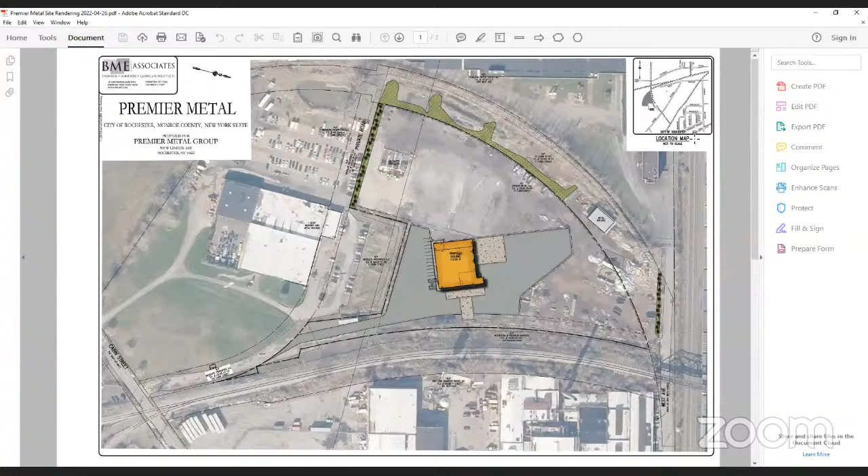All right, can you guys all see this okay? Yes, we can see the screen. Okay, perfect. Not a problem, just whoever the host is needs to enable the participant screen sharing. I'm getting like a weird looping going on with the audio. Mary, can you mute yourself, please? I think the feedback is from Mary live streaming. Oh okay, so yeah Mary, if you want to mute the YouTube live stream, that's why we're getting that weird echo. Anyway, okay perfect.

So thank you guys very much for having this special meeting. We're probably just a little sad not having a quorum again, but at least we get the other member here. We can give you guys an update and let you know what we're planning to do at this site.

So our project is located at 11 Cairn Street. It's over in kind of the western portion of the city. This graphic here is twisted, so north is actually toward the right of the screen. The site is located between Cairn Street and West Ave. Cairn Street is down here at the lower left portion of the site, or the screen. We have access to that site through the adjacent property. There are agreements in place, and we'll be doing some formalized easements to make sure that's documented in perpetuity. But again, we access off Cairn Street. We're about 600 feet into the site before you can see it, so there isn't a lot of visibility from that site.

The purpose of our application to the city was to develop a replacement building for a structure that was located there and burned down several years ago. The facility itself for the site does metal scrapping processing. So they effectively bring in materials from different businesses as well as a little bit of materials from private individuals looking to scrap the material, obviously for some money compensation. So basically, a client will come into the site and bring the materials in.

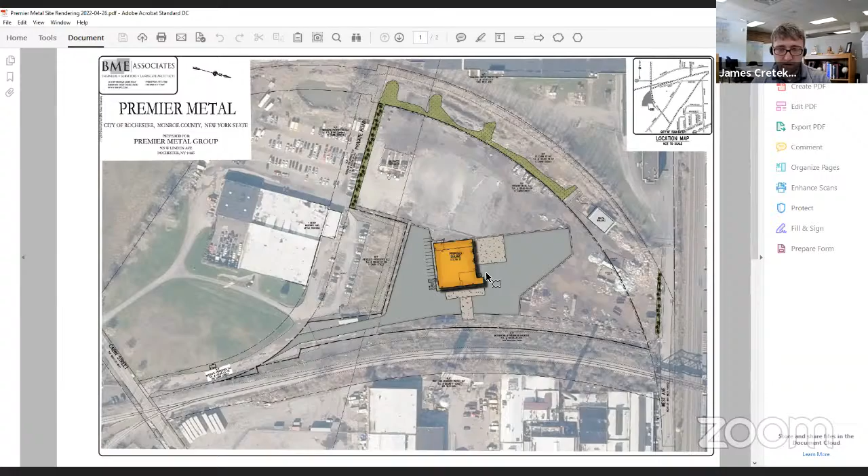The facility we're looking to build here is about 12,250 square feet. It does contain a small office area, so I'll zoom in here a little bit. The office area is going to be located in this portion of the building, with some meeting rooms, bathrooms, etc. The rest of the building is going to be basically a general storage area.

There will also be a couple at-grade loading dock areas here with some smaller scales for the smaller users and customers of the site, as well as a recessed loading dock for any larger tractor trailers that need to be loaded off. So this will be recessed, and then there'll be an at-grade loading dock where they can get the materials off at the finished floor elevation.

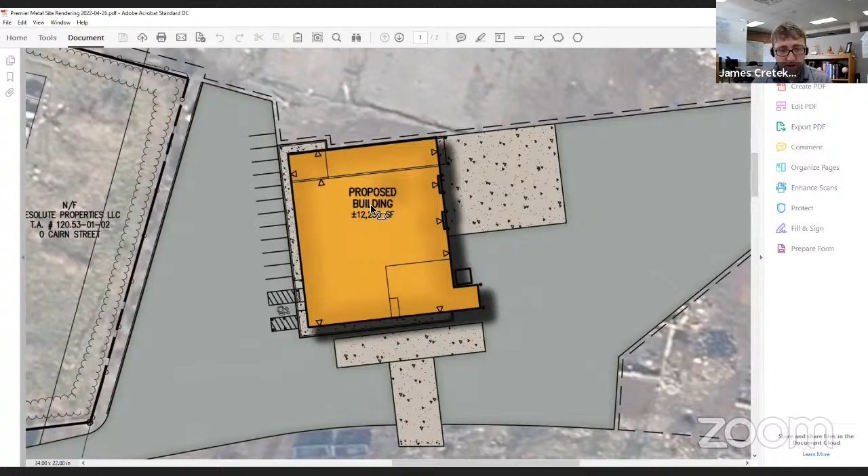The gray area you see shaded here is all going to be flexible pavement, so asphalt pavement, as well as some concrete pads at the loading dock areas. This area to the south, or lower portion of the building on the screen, is going to be for the vehicle scales. A vehicle will come in with all the materials, get weighed in here, move around to the back or wherever they're going to be unloading it, and then weigh out on their way out. The difference in the weight is how they calculate the funds that they will be compensated for.

Right now, the site is really just a heavily compacted gravel area. This is the site as it stands today. Again, you can see that it's pretty well utilized. There's a lot of vehicles inside, that's why it looks pretty beat up, and that's why gravel is a pretty appropriate surface treatment for it.

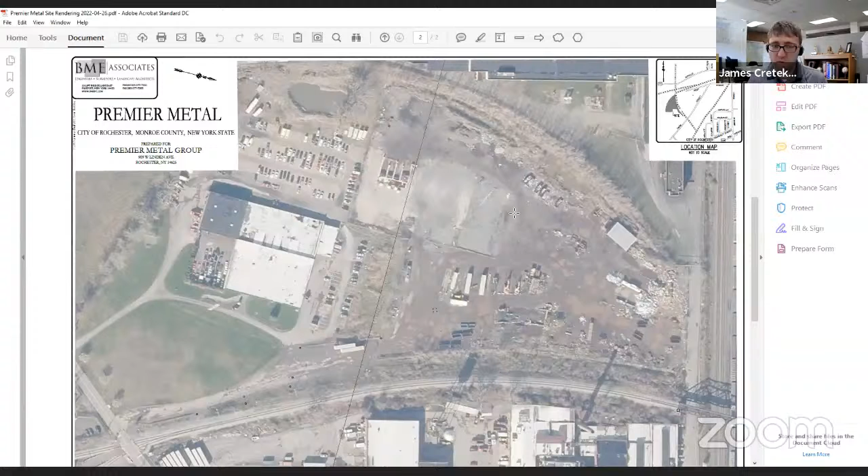However, with the improvements, we're going to create a more dedicated customer area and make it a bit more nice for the users when they come to the site. So in front of the building here, we have several parking spaces that are going to accommodate the employees as well as the customers.

I believe at any given time they're going to probably have about 7 max employees at full build out, and you probably have somewhere at a max of about 5 customers at any time. So the parking spaces we have provided here are more than enough to accommodate both the employees as well as the max number of customers at the same time.

A lot of the asphalt improvements to the rear of the building are really just to facilitate tractor trailer movements. They don't need to get into the gravel areas, although they're highly compacted and already do adequately support those vehicle movements. But again, we just wanted to make the site a bit more user friendly.

As part of the project, we will be bringing in new utility services. We do need to bring in a new water line. The former building that was located on site, to the north part here, you can almost see where the pad used to be. The building was quite a bit larger, approximately 32,000 square feet, so they are downsizing this a bit from what they had before.

But when that building had a fire event and burned down, the water service that was extended through the building to the south, or to the left on the screen, was removed and abandoned. So we're going to be bringing in our own private water service from the Cairn Street public water main. We will be providing backflow protection equipment, which has already been reviewed and approved by the City of Rochester Water Bureau. We're just waiting for final approval from the zoning office before we can get plans signed and move right into construction.

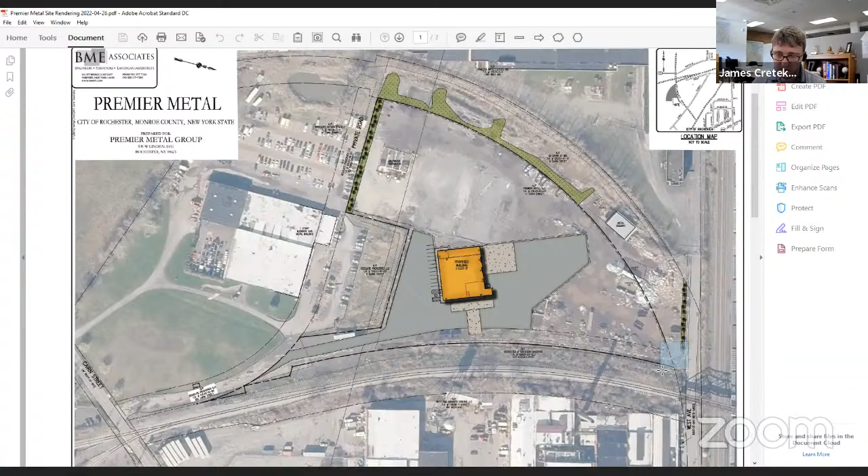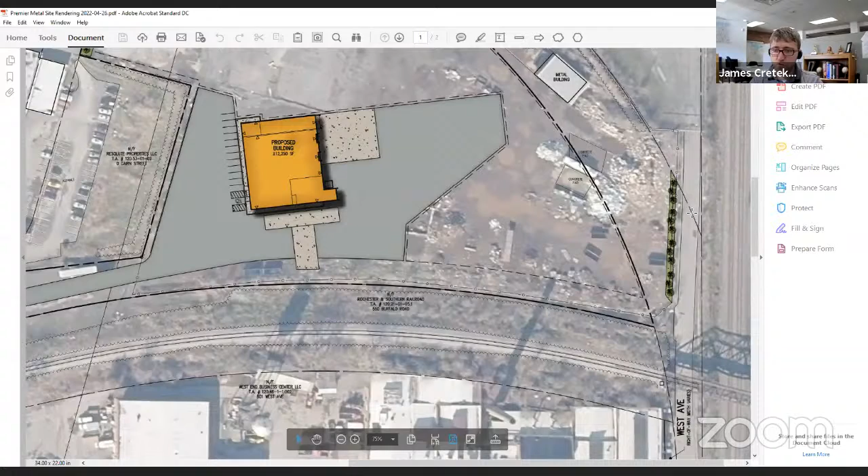We do have a secondary access onto West Ave at the north end of the site. There is a gate located in this area. It generally remains closed, but in case of an emergency, fire access, or some other reason, it can be opened to provide access onto West Ave. This technically isn't a frontage of a public right-of-way. The public right-of-way for West Ave effectively ends at this railroad crossing, so we don't really have true frontage on this side of the site.

However, as we received several comments back from the zoning department, screening is obviously a key factor for this site just because of its nature. We are looking to do some additional landscape plantings in this location, adjoining the neighboring property's rear parking area, as well as providing additional screening on the north end of the site along the right-of-way of West Ave.

As we discussed last time, the site is a completely secured site with an entire existing perimeter fence around it now. I believe the applicant is in the process of looking to replace that fence in kind with something newer. There are some areas that have been damaged from people trying to access the site and acquire materials illegally, possibly for rescrapping. So I know they have a lot of safety implementations they'll be looking at as well, cameras around the building and things like that.

Lighting is going to be limited to the front parking area, as well as around the building site, primarily for security purposes. The facility is secured at the end of the night and locked down, so the light fixtures in the parking area will be dimmed accordingly.

And our HVAC electrical systems, there are still services into the site from some of their previous utilities, so we'll be reconnecting and revising those as necessary for the building.

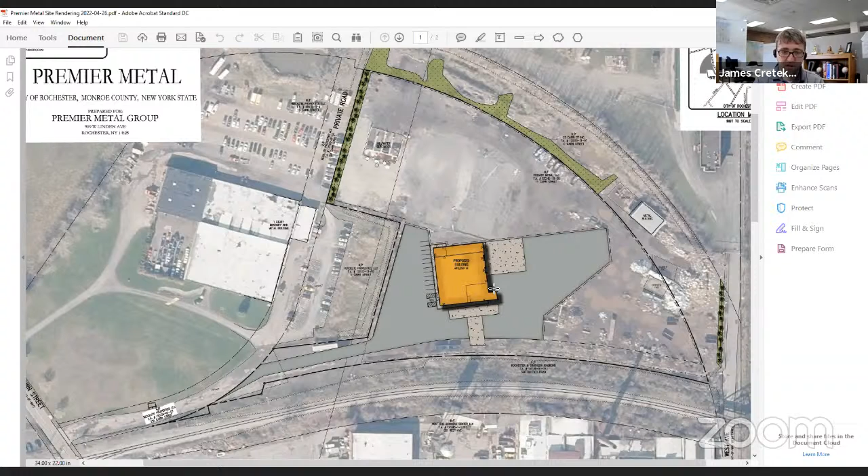We will have a small dumpster enclosure, again just for the office uses, which is going to be tucked behind the building in this corner, out of sight. You won't be able to see that from any of the public right-of-ways.

I think that's mostly a good summary of the site, but we're happy to answer any other questions. We can get into the details of the business processes or any other site concerns you guys might have, or that didn't come up at the last meeting.

I just have one quick question about vehicle access, basically trucks that are bringing in materials. Do they go straight to the scale, or I assume some kind of sign is going to be posted on what they should do first?

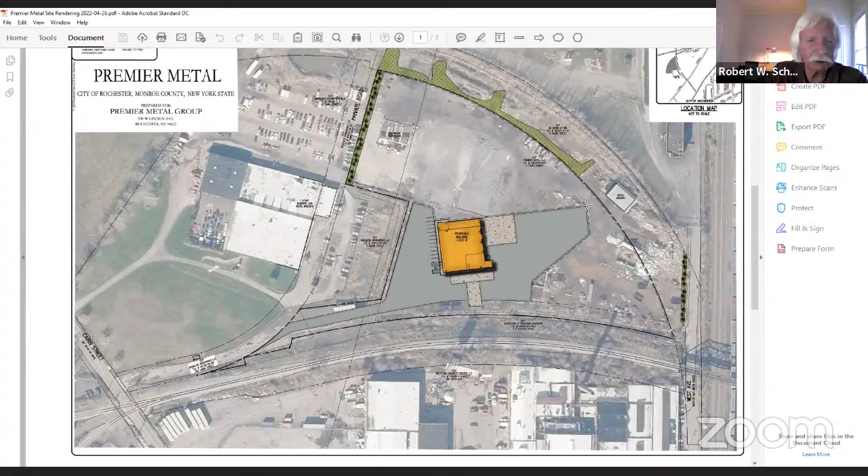Yes, I believe the typical process would be them coming in and pulling up onto this concrete scale, and then they have access through this door right here, which should be a customer port. So they'll come in, go into the customer zone, talk with somebody, weigh the scales, and then the employees on site will be directing them where to go and what's appropriate from there.

James, I would like to add that when those trucks come onto the site, there's signage explicitly identifying what's acceptable and what's not acceptable. When they sign in at the guardhouse or scale house, they will also be preparing an affidavit that the materials they're bringing are consistent with our material acceptance policy. That's a state and federal regulation.

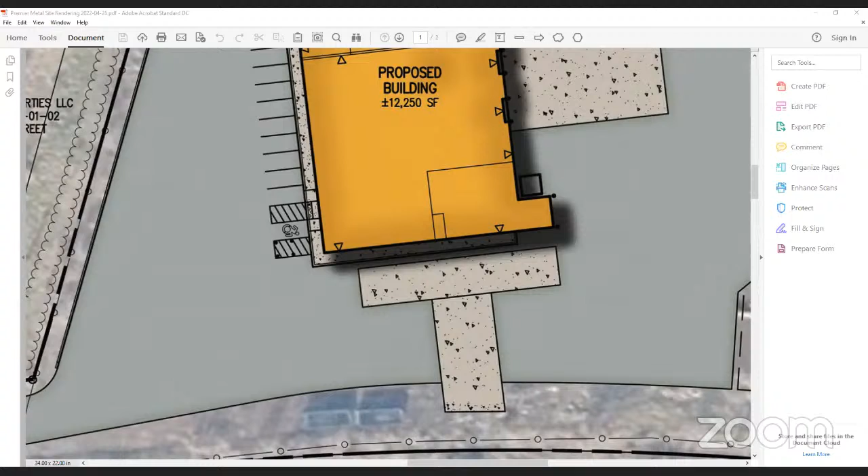And so then the flatbed or whatever kind of truck it is, do they go to the next concrete slab toward the top of the page?

So this slab here is just outside the loading dock areas. This is just good practice when you have tractor trailer equipment making turning movements - a lot of times they'll park and just turn the wheels without actually moving. On flexible pavement, that can be very detrimental and cause a lot of rutting. So this is mainly in front of the loading dock areas where there could be tractor trailers, single unit box trucks, or vehicles of heavier nature, especially with loaded scrap materials. That's just to help elongate the life of this area.

Okay, so when they weigh it, the non-ferrous materials obviously go inside the building.

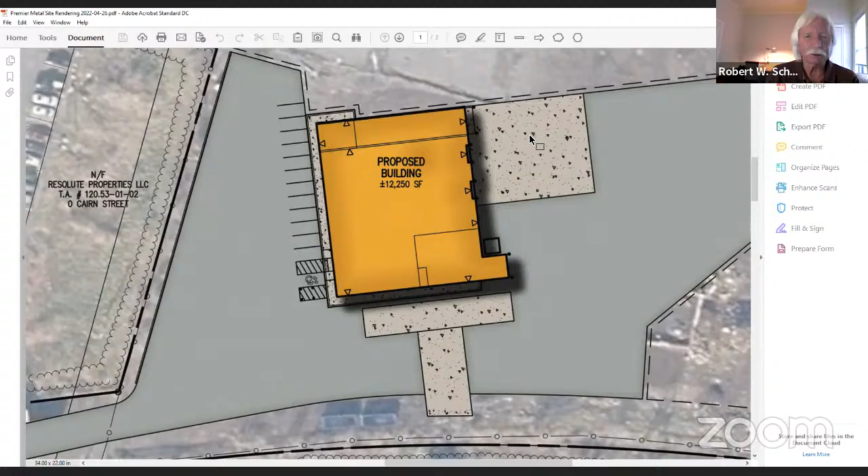And then when the truck is done, which way does the truck head? So the truck will basically turn around on this asphalt area, come right back to the same scale, and then proceed right back out to Cairn Street the way they came in. There's enough turn radius there for a big truck, let's say.

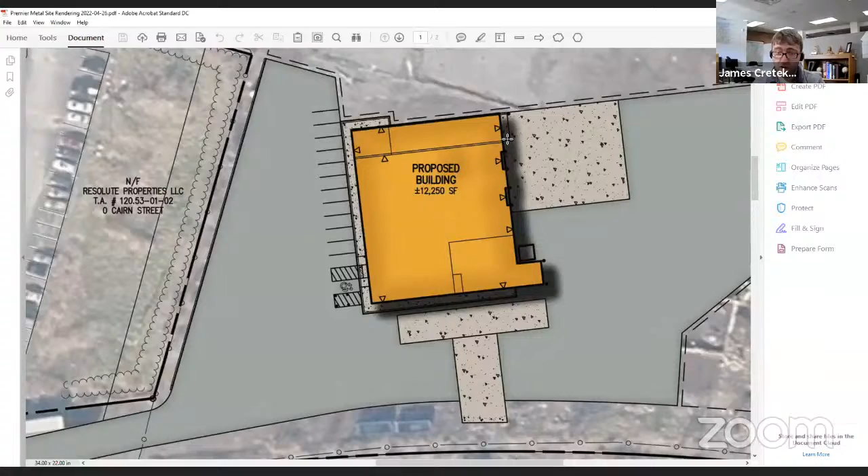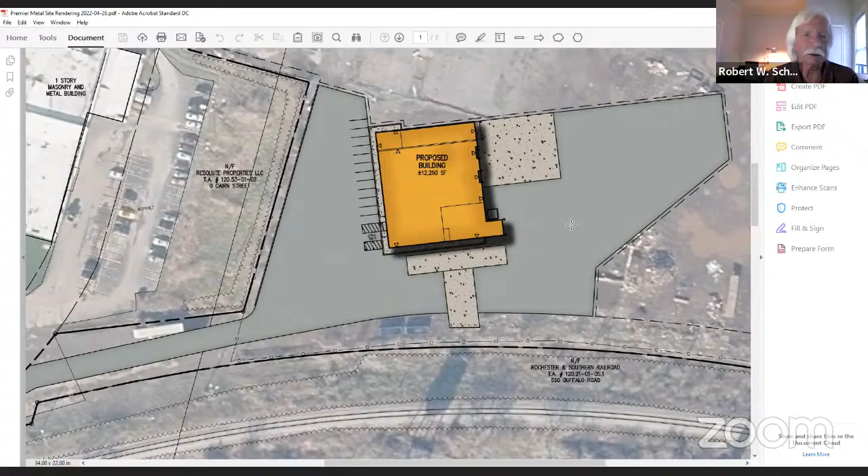Okay, so my question is, the truck that brings in the materials, they don't really go to the gravel yard toward the top of the page there? No, the areas outside of this flexible pavement are really going to be for the employees only - that's where they'll have their various piles and things of that nature stored outside of the building.

Okay, no that's fine. I was just wondering what the traffic pattern was, and I'm okay with that.

I don't have any questions. Rosemary, if you could put any in the chat. Does anyone have any questions? Nope. Okay, is there anything the Premier Metal team would like to add before we wrap up?

I think we've covered it all between this meeting and the one before, but if you have any questions, especially you, Rosemary, as you're working through your determination, please don't hesitate to reach out to me. I can coordinate with both Mike and Bill on any issues, or if you need support with part 2 or part 3, I'd be happy to provide input or help facilitate that.

I think prior to this, Mary had gone through so we'd have any questions to ask you tonight, and I don't think we have any, Mary. I should check though, did we have any questions? The ones we had were answered prior to this meeting.

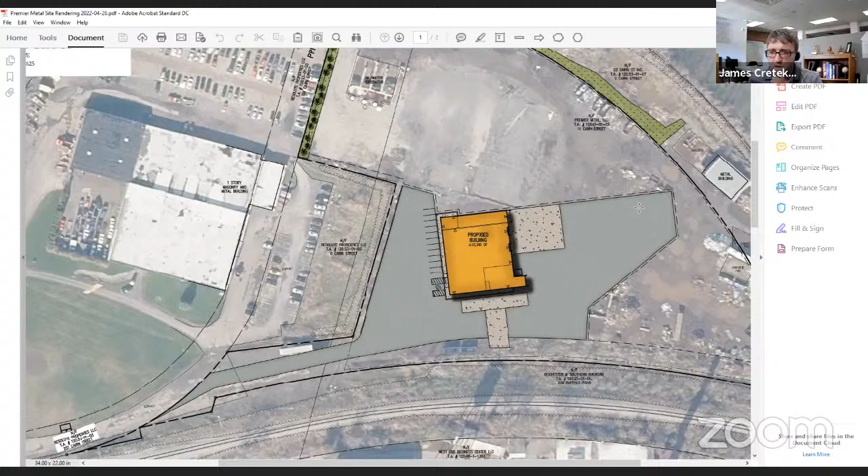Does that make sense? Yeah, so you said we'll get the SEQR, and what was the second thing? The site plan review, the final site plan review findings. It's effectively the approval letter with conditions. I don't believe, James - I've only been involved with this on the SEQR so far - that there are any variances or anything else needed. It was straightforward, I don't think there was.

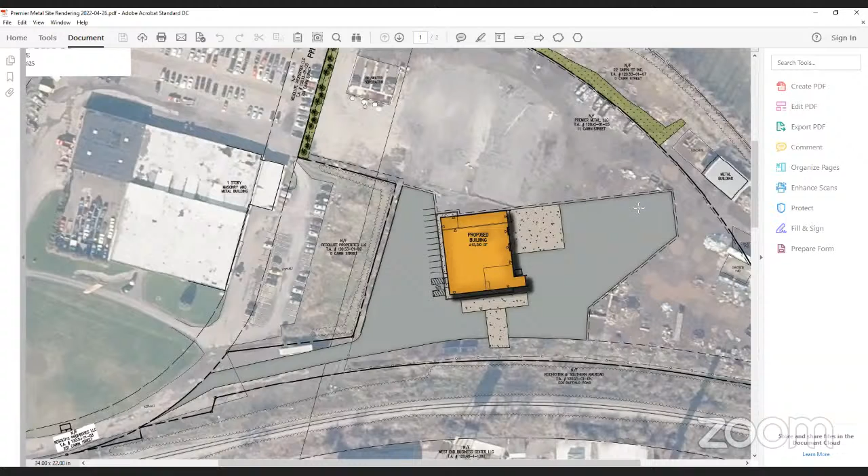So yes, you should be getting all of that back from us in the next couple weeks, and we'll work to do it as quickly as we can. I think we're all set on our end. As soon as we get Monroe back, we can get you up and running.